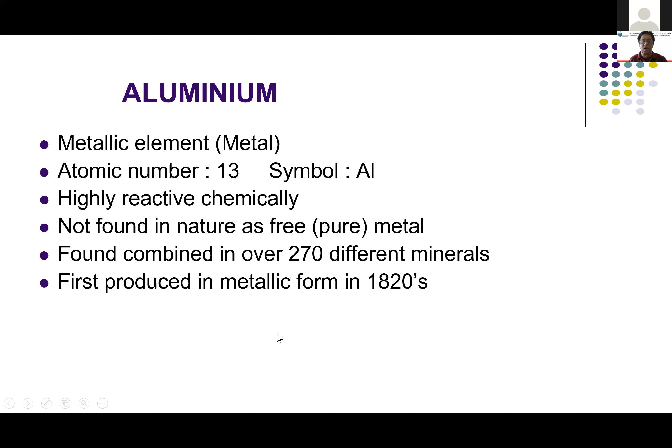This was produced in the year 1820. It was discovered roughly about 200 years ago, and is one of the youngest metals. Source of nearly 99% of metallic aluminum is bauxite. It's a mixture of similar minerals that contain hydrated aluminium oxides.

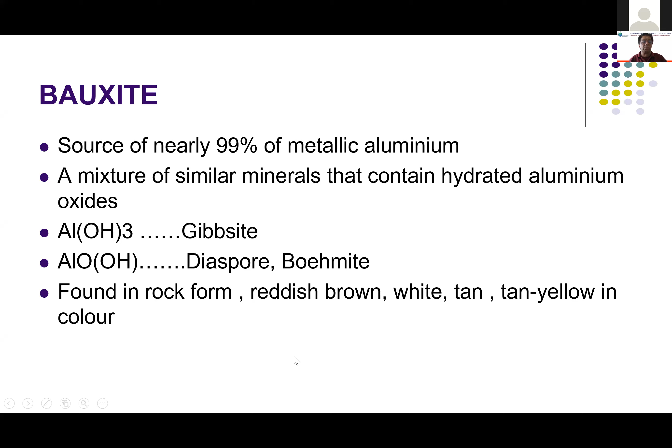How much aluminum is on Earth? This is just for your information. Roughly in the core of the Earth, there is 32% iron - that's right in the core. Some amount of iron is available on the surface. Oxygen, silicon 5%, magnesium about 13%, sulfur 3%, nickel 1.8%, calcium 1.5%, and aluminum is 1.4%. This aluminum in the crust, the outer surface, is about 8%.

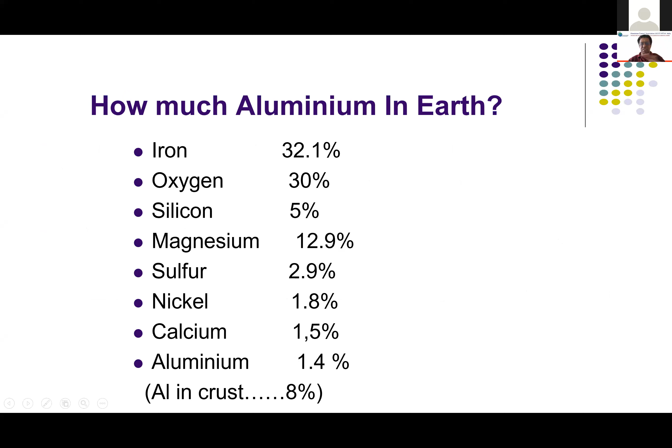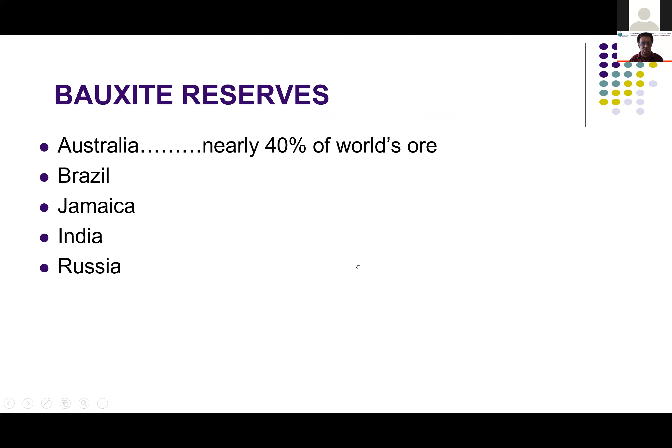These are the major countries producing bauxite from which we extract aluminium: Australia, about 40% of the world's available ore content, then Brazil, Jamaica, India, and Russia. So India is one of the top 5 for bauxite reserves.

You all know that aluminum was originally extracted and reduced to metallic aluminum in 1820 by chemical reduction process, which was very expensive. In the early stages, aluminum was more expensive than silver.

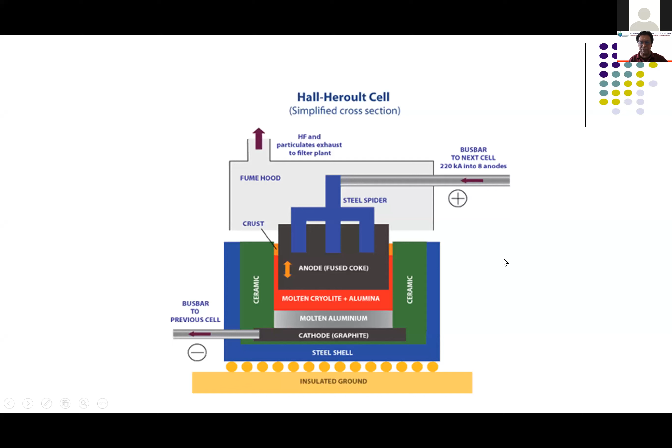Then later came the Hall-Heroult cell process. There were two scientists, Hall and Heroult, who produced this electrolytic process. They discovered this method by which the extraction of aluminum became extremely easy and fast, and the cost of metal also came down drastically.

When you are smelting aluminum, it's a highly energy intensive process - roughly about 15 kilowatt hours, that's about 15 units per kg of metal produced from the bauxite. Abundant hydroelectric power source is needed. Worldwide, roughly about 65,000 metric tons were produced in the year 2021, and the projection is about 70,000 metric tons in the year 24-25.

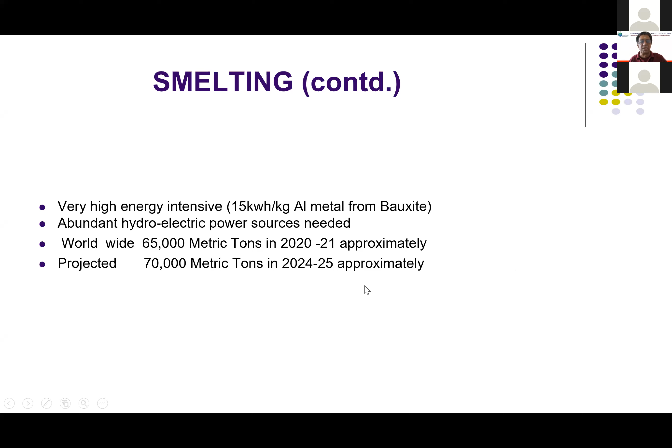Aluminium is a very versatile material. It can be cast, forged, extruded, rolled, drawn, welded, machined, heat treated, vapor deposited, electro deposited, chemically colored, painted, etc. Very versatile metal.

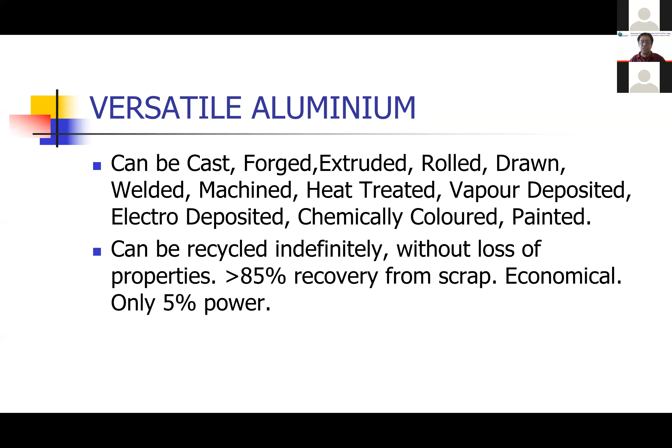It can be recycled indefinitely. This is the most advantageous part of the basic metal, without loss of properties. When you are remelting, refining and recycling it, the original property is not lost. Normally 85% of the scrap can be recovered economically, and recovery or recycling costs only 5% of the original power required to produce fresh aluminum from bauxite.

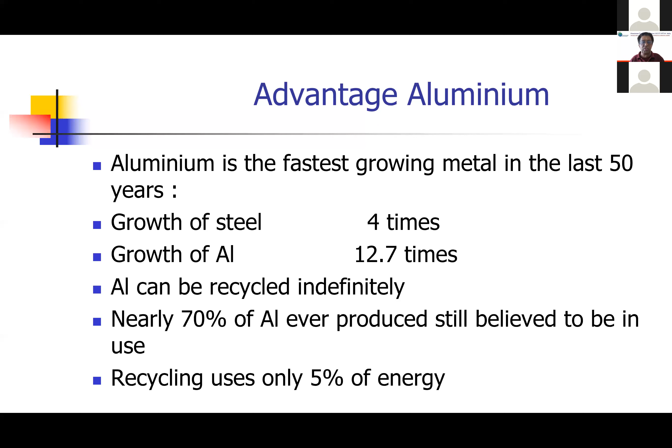Aluminum is the fastest growing metal in the world in the last 50 years. Growth of steel in the last 50 years is roughly about 4 times, whereas aluminum is about 13 times more. Aluminum can be recycled indefinitely. Nearly 70% of the aluminum ever produced, I believe, is still in use over the last 50 or so years and more. Recycling uses only 5% of the energy.

Caution - aluminum, though it is very advantageous with all the plus points, is the most unforgiving metal. If not treated with due respect and care at every stage of manufacturing, it will extract a heavy penalty. Process control parameters are not to be trifled with.

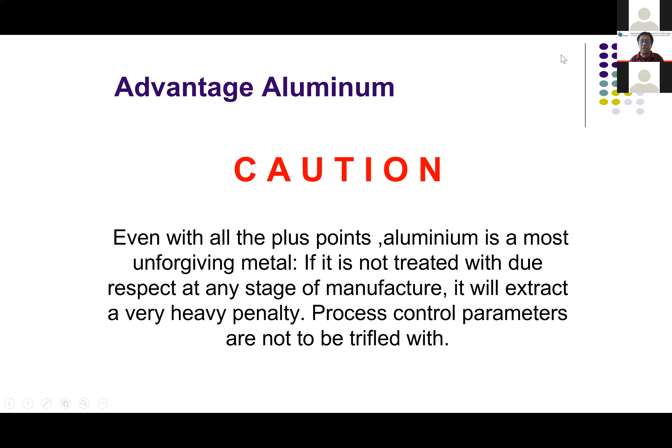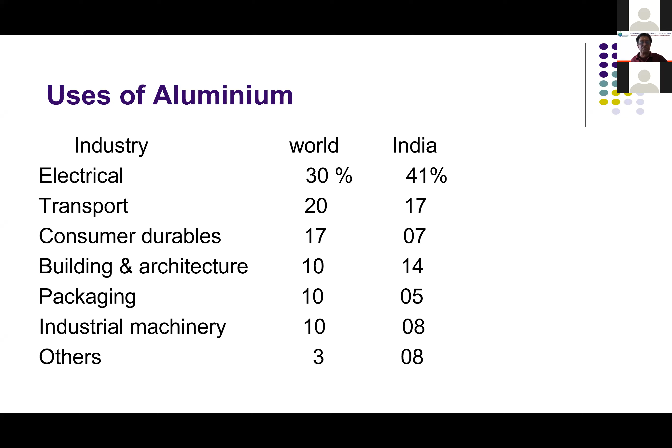Uses of aluminum - you are all familiar. The electrical industry, worldwide as well as in India, consumes most of the aluminum, roughly about 41%. Transport 17%, which includes people like us who are in the casting industry. Consumer durables 7%, building and architecture about 14%, packaging 5%, industrial machinery 8%, and other applications 8%.

Present status of die casting industry in India. This gives you a very rough idea of where all aluminum die castings are used in India.

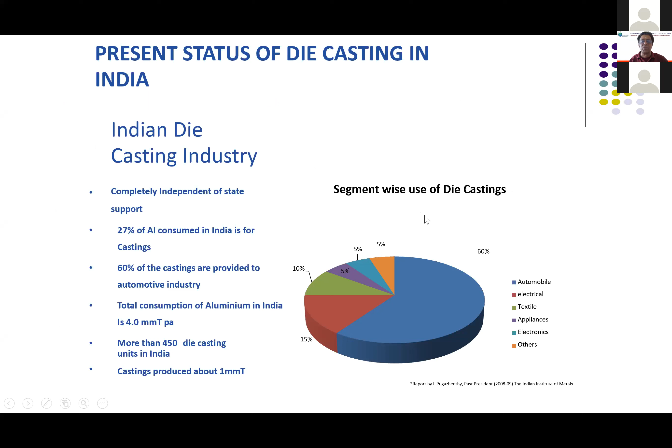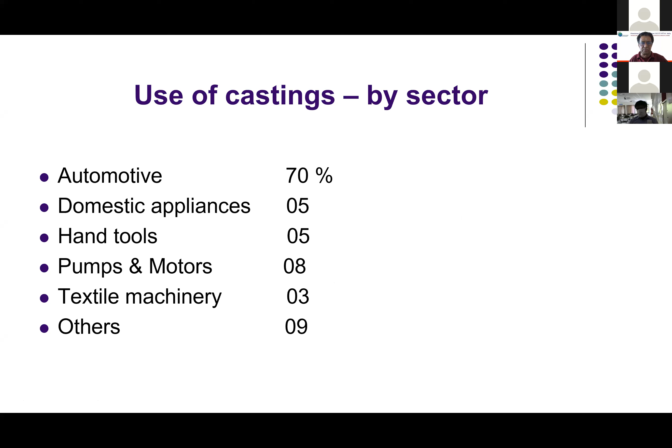Uses by sector - the automotive sector uses about 70% of the castings produced. Domestic appliance 5%, hand tool 5%, pumps and motors 8%, textile machinery 3%, and others about 9%. These are some of the castings used in automobiles, just to give an idea.

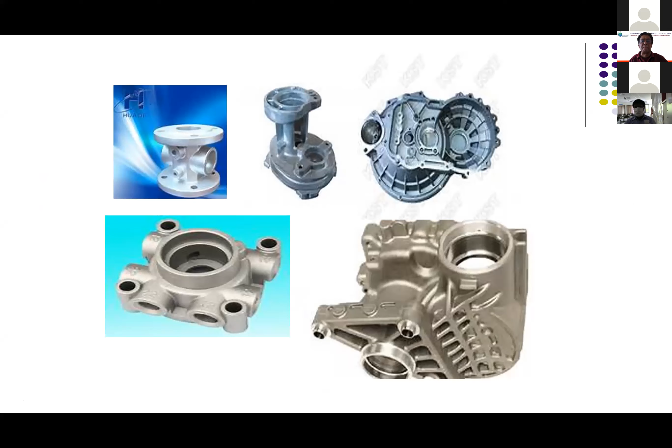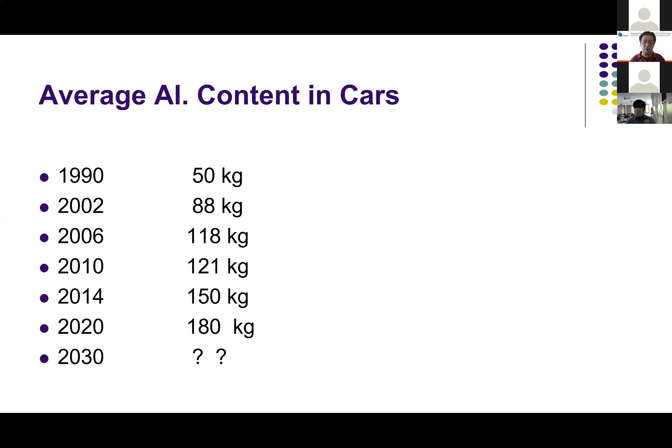These are the historical aluminum content in cars. The major consumer for the die casting industry is automobile, and most of it goes into cars and two-wheelers, motorbikes, etc. Roughly in 1990, 50 kg of aluminum components and castings were used in cars. Today it's about 180 to 230 kg, and it's going to be much more. We've already exceeded roughly 200 kg of aluminum components per car. I believe Tesla is producing even the body with aluminum sheets and castings.

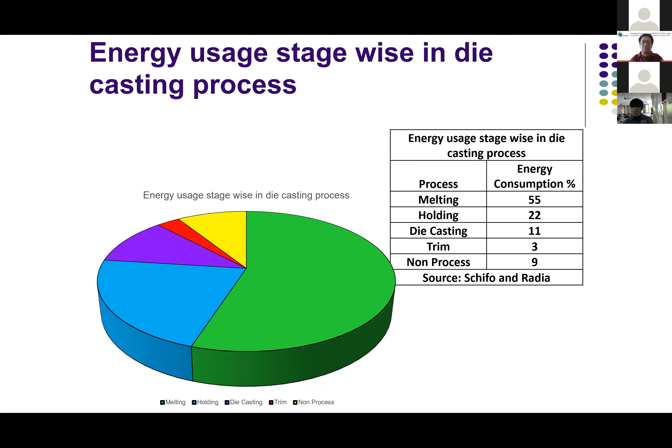Now let's come back to pure aluminum. When you say pure aluminum, it's about 99.5% to 99.8% pure by weight. Density, as you all know, is 2.7 grams per cc. Pure aluminum melting point is about 660 degrees centigrade. The material is very soft and malleable, ideal for wire drawing and making very thin foils. Aluminum foils are extensively used in the packaging industry. Major uses are electric wires, foils, and sheets. This is pure aluminum.

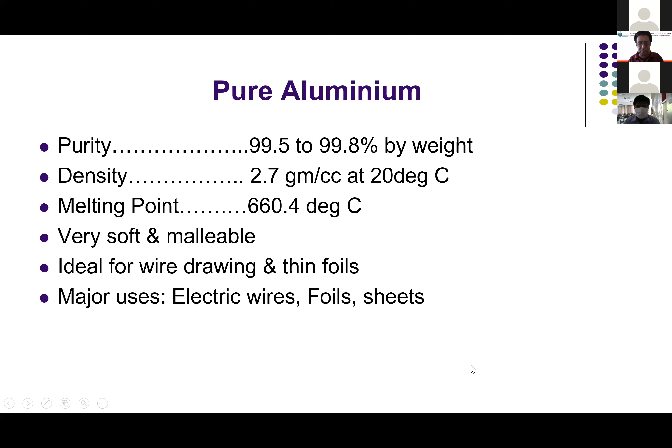There are also some castings made of pure aluminum. I'll come to that slightly later.

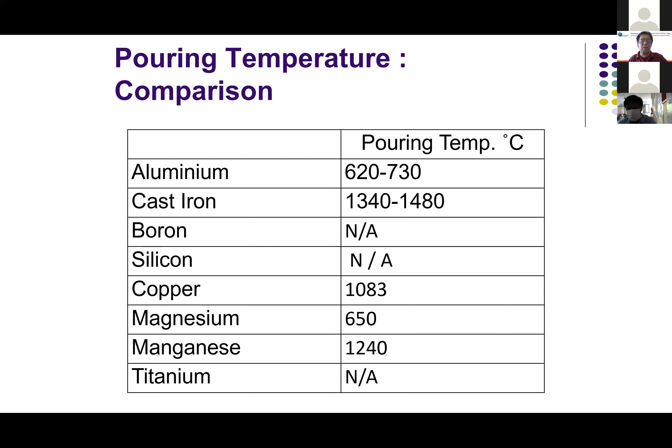Pouring temperature, same comparison. Now comparing density: aluminum is 2.7, roughly one third of iron. That gives a major advantage over steel and iron. Boron is 2.3, and copper is 8.96, so copper is also a much heavier metal. Magnesium is of course lighter, at 1.74.

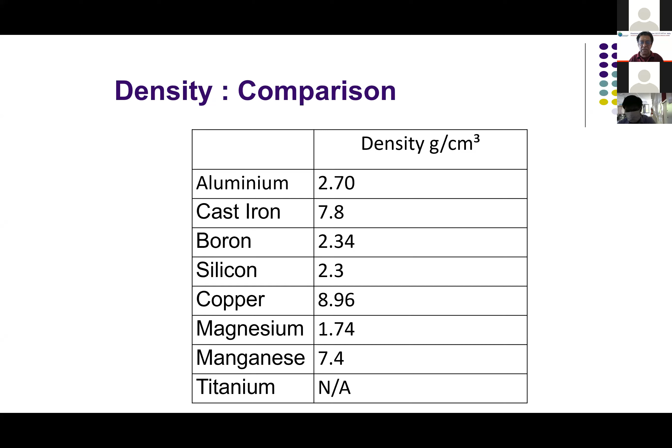Pure aluminum has very low fluidity and is very difficult to cast, especially in gravity die casting, though to some extent it's possible in sand casting. The suitable process is centrifugal casting for rotors, and also pressure die casting in some special processes for rotors made of pure aluminum. I have been to a foundry where they produce rotors by PDC. Aluminum also has a very high affinity for iron. It's highly reactive, as I told you earlier, and has a high affinity for iron, so the tendency to stick to the steel die is very high. This point will come back slightly later.

Now, gentlemen, having spoken a little bit about pure aluminum, I'm coming to the main part: the alloying elements and their effect. This is our main subject for today's program.

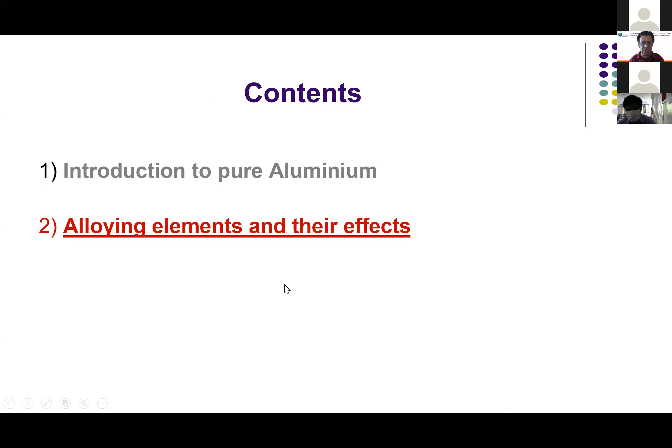What is an alloy? An alloy is nothing but a homogeneous mixture of two or more metals and elements. It should be a homogeneous mixture - in the molten state it should be thoroughly mixed. Properties of an alloy differ from the alloying elements. You take a glass of water and add a little salt - water has different properties, salt has different properties, but the salt solution produced has slightly different properties; something comes from water, something comes from the salt. The same thing happens in aluminum alloy. When you make an alloy of aluminum with silicon or copper, it takes some properties from silicon, and the major properties of aluminum are retained, forming a third metal with slightly differing properties. Properties depend on the proportion of the metal - if you're adding three or four metals to aluminum, it extracts different properties proportional to the percentage added.

Now, there are two things in alloys: one is the major alloying element, the other is minor. When I say major, the proportion is much more than 1%, up to 20-25% - silicon, copper, magnesium are all major alloying components. Minor elements are iron, manganese, nickel, zinc, lead, tin, and titanium. We also add a little bit of strontium, etc. I will come to that slightly later.

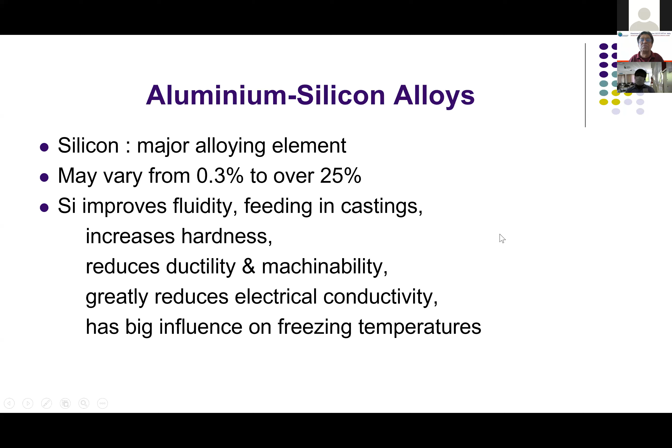It has got a very big influence on freezing temperatures. Pure aluminum freezes at a particular temperature, whereas when silicon is added to aluminum, the freezing temperature makes a change, differs a little bit.

Silicon has the most favorable influence in comparison to all additional elements. We have aluminum, copper, silicon, magnesium as the major alloying components. Silicon has the most favorable influence and is very widely used. Aluminum silicon alloys are very widely used - probably more than 80-85% of all the alloys used in the casting industry are aluminum silicon. Silicon is always present; there are very few alloys where silicon is totally absent, like LM11, aluminum copper.

Coming back to aluminum silicon alloy, solidification shrinkage is only 3% for eutectic composition versus 6% for pure aluminum. Solidification contraction is about 6% for pure aluminum, whereas when you add silicon and make an alloy, the solidification contraction is 3%. That means it is easy to cast, especially in gravity and low pressure casting.

Silicon addition improves the grinding and polishing properties. This is important because nowadays the castings need to be finished after proper machining and all. So silicon, to a great extent, improves the hardness and improves the grinding and polishing property.

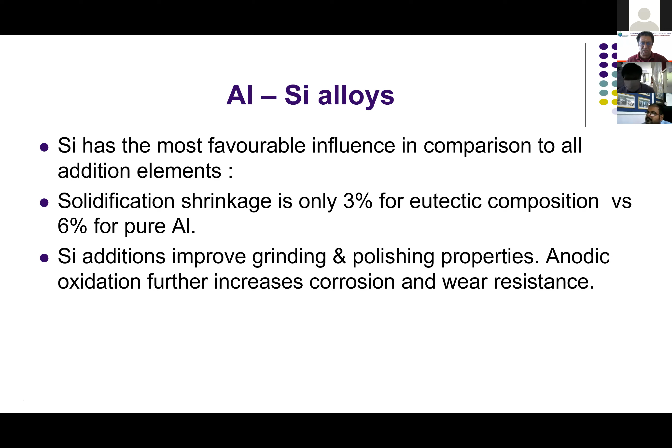Anodic oxidation further increases corrosion and wear resistance. Wherever you expect a corrosive atmosphere and where there is going to be a requirement for wear resistance, silicon is your main alloying element. I'm just giving a phase diagram here.

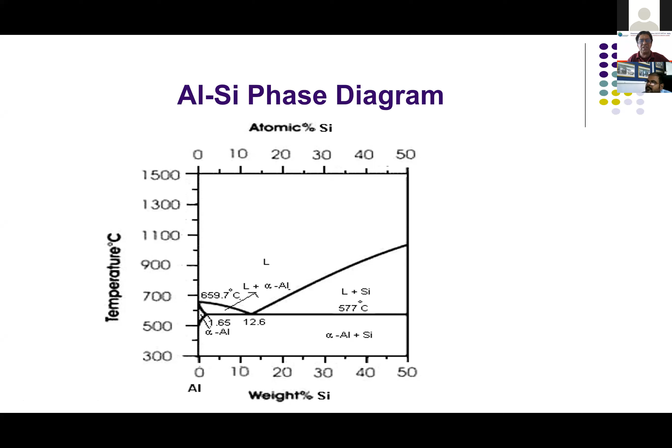Whereas in the conventional Sklenar furnace or rotary furnaces, when you make an alloy, the silicon going into solution is to be ensured. The operator or shop floor engineer standing near the furnace has to see that the silicon goes into solution properly. That is why I normally recommend, when the customer gives a range of 11 to 13, stick to below 12, stick to 11.5, below the eutectic point, which will ensure that you have only alpha aluminium, not pure silicon present in the alloy.

And the alloy maker will always tell you, you are going to remelt it anyway, my ingots are going to be remelted - fine, he is correct. We are remelting it, but we are not going to increase the temperature beyond 750. You require 800 plus to ensure that the silicon goes into solution properly.

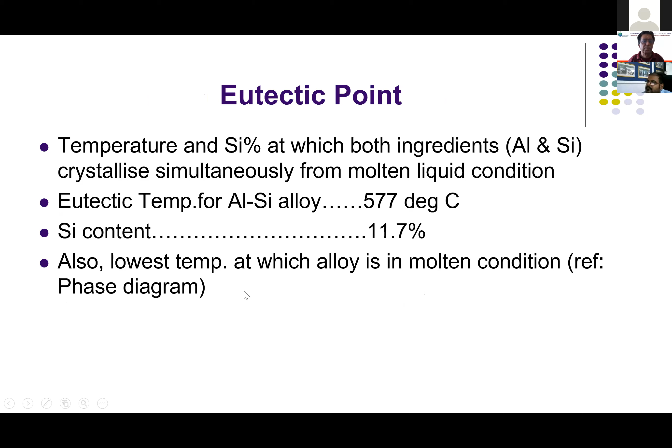Okay, so if we are talking about this, hypereutectic silicon alloys are beyond about 13%. For example, piston alloy - in piston alloy, if you polish it, you can see the crystals of silicon particles. It gives extremely high hardness, and it is very difficult to machine a piston. You require highly sophisticated diamond tip tools, etc., to get a proper machined surface. This is why they are adding more than 13% - we require a very good surface hardness on the pistons, especially in automobile engines.

The piston is the one which gets a lot of wear and tear, and therefore it requires extremely good high surface hardness. That is why we add more than 13% silicon. Hypereutectic alloy is very difficult to machine due to high silicon content, but shows very good wear resistance, hence used in pistons.

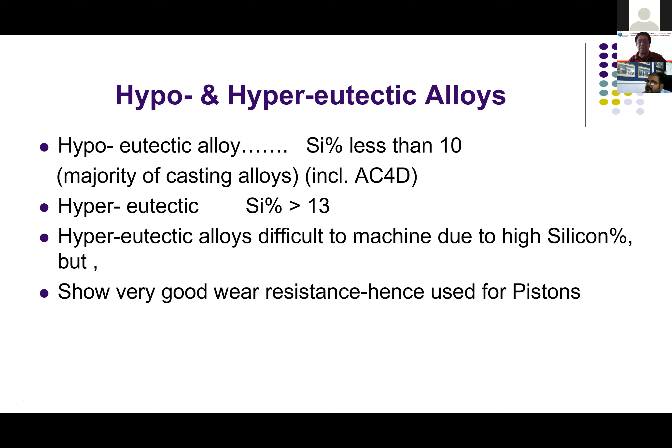So that's why whenever I suggest that the casting people should visit the alloy maker, or if you are making your alloy in-house, you ensure that the silicon goes into solution properly. If the silicon does not go into solution, it is going to create more problems in the form of shrinkage at the casting level. While cutting and grinding, you'll have rough surface, and your tools also wear and tear very fast.

Now coming to the alloying element copper, the second major alloying element. Copper is a metal, whereas silicon is a non-metal, that's why we called it an element earlier. Copper's melting point is much higher, but still at 750 degrees centigrade, copper is added to liquid aluminum. It dissolves like ice going into lemon juice, like salt dissolving in water.

When you maintain aluminum around 750 degrees centigrade, you add copper in the form of small ingots, piglets, copper wire, or copper scrap. It goes into solution beautifully and dissolves very well, so dissolving copper is not a major issue. Even though copper's melting point is very high, and silicon's melting point is also over 1400 degrees centigrade, it dissolves in aluminum maintained at 825-850 degrees.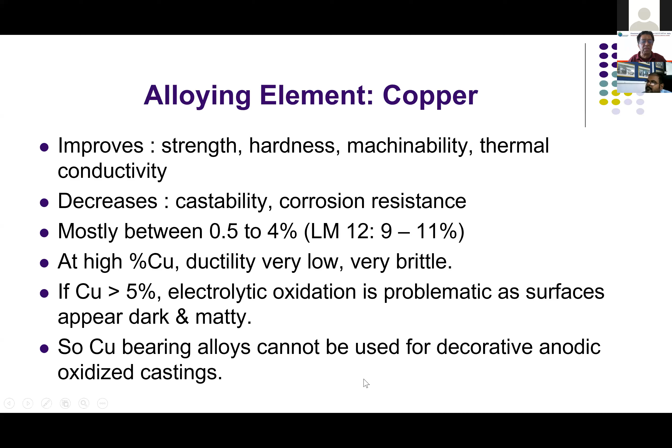Copper bearing alloys also cannot be used for decorative anodic oxidizing casting. The anodic process cannot be employed in copper bearing alloys. This is very difficult.

I came across an alloy, LM12, which has very high tensile strength and elongation beyond 10%, but castability is poor. You can do low pressure die casting or other types of casting, gravity die casting is also possible, but sand casting is widely used for this particular alloy. It is heat treatable, which I'll come back to slightly later, though I won't go too deep into it.

As I told you, there are a few elements which go into solid solution - one solid dissolves in another solid. You're all familiar with a liquid dissolving a solid, for example water dissolves sodium chloride crystals. Molten aluminum dissolves copper, molten aluminum dissolves silicon, molten aluminum dissolves iron, bolts and nuts - everything gets dissolved.

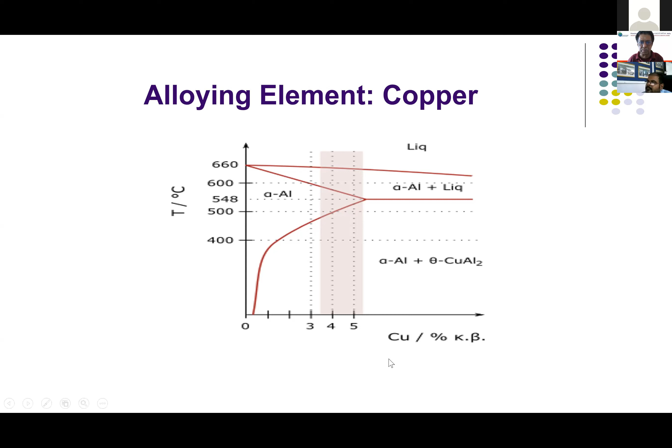Now coming to magnesium - normally it is added between 0.25 to 0.5%, and it improves the hardenability by heat treatment. The same thing happens here. I'll show you the aluminum-silicon-magnesium phase diagram, and come back to it slightly later.

Magnesium has the same property as copper. When heated above 400 degrees centigrade, the magnesium in the grain structure dissolves inside the aluminum structure, and then reprecipitates during controlled cooling and other heat treatment processes. This improves the hardenability. The most widely used alloy is LM25, where silicon is about 6 to 7.5%, and magnesium is about 0.3 to 0.5%, which improves the hardenability.

Here I would like to say something - many people are using LM25 in gravity die casting. This entire lecture was prepared for a classroom session, and here I'm not able to see you, so I'm finding it a bit difficult to explain, as I don't have a drawing board to draw and show you.

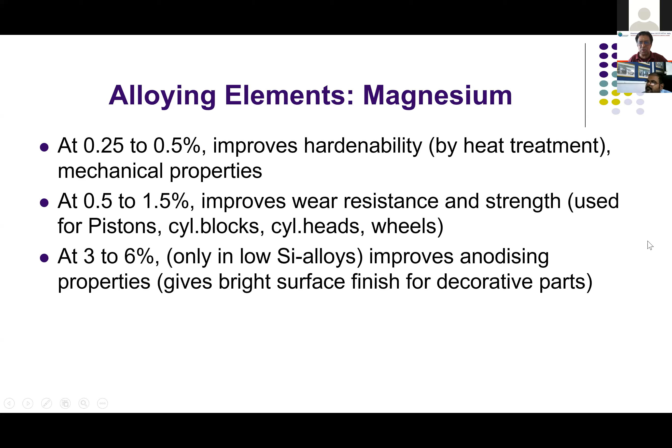0.5 to 1.5 improves the wear resistance and strength. Again, 1.5% is used in pistons, cylinder blocks, cylinder heads, and wheels. 3 to 6%, only in low silicon alloys, improves anodizing properties, giving a very bright surface finish for decorative parts. These are all more towards the non-automotive components.

Back to alloying: due to low potential difference between Mg and Al, corrosion resistance to alkali and seawater is very high. Therefore, use of magnesium in chemical industry, shipbuilding, and food industry is recommended.

Magnesium bearing alloys, grades of magnesium as primary alloying element, are ideal for decorative applications. There are some alloys where the magnesium is about 5-6%. These are mainly used for decorative parts where you get very good colors and very good surface finish.

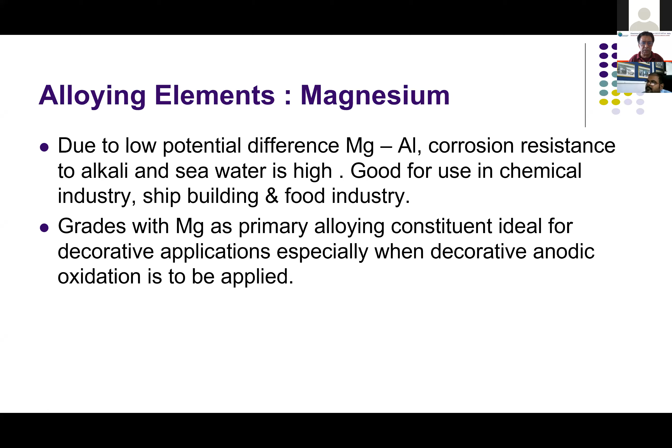As I explained earlier, this also goes into solid solution. Suppose you have 0.3, or let's say 3%, you are somewhere here. When you heat it around 520, 530, the magnesium disappears completely. Then when the temperature slowly comes down, magnesium reappears in the finer form, improving the hardness and tensile strength. So therefore, magnesium below 0.1 is of no use. Magnesium has to be above 0.25, around 0.3 to 0.4. Highly recommended is 0.35 to 0.45.

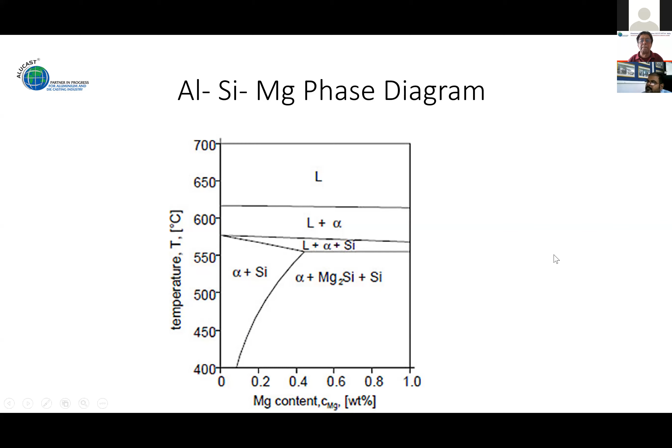Coming back to alloying, iron. Iron is not an alloying element per se, I repeat, iron is not an alloying element per se. Aluminium has got a high affinity to iron. Molten aluminium literally eats iron—whether it is a spoon, ladle, skimmer, or dross remover—it will just dissolve in molten aluminium. So we have to take proper care while using steel spoons or steel skimmers.

It should be properly coated with oxide so that the metallic surface does not come into contact with the molten metal. Even at the smelter where pure aluminum is produced, the major impurity is iron. So aluminum has got a high affinity for iron. Beyond 0.5% iron reduces the castability.

So we normally recommend iron below 0.4. For low pressure and gravity die casting, ensure that iron is below 0.4, especially where the metal is held for more than 6 to 8 hours inside the crucible—there the problem of iron pickup will be more. If you measure iron at the beginning and end of the shift, you will see a marginal increase. Once iron gets into the molten metal, it is difficult to remove. Reduction is impossible, removal is impossible. Reduction is possible only by dilution.

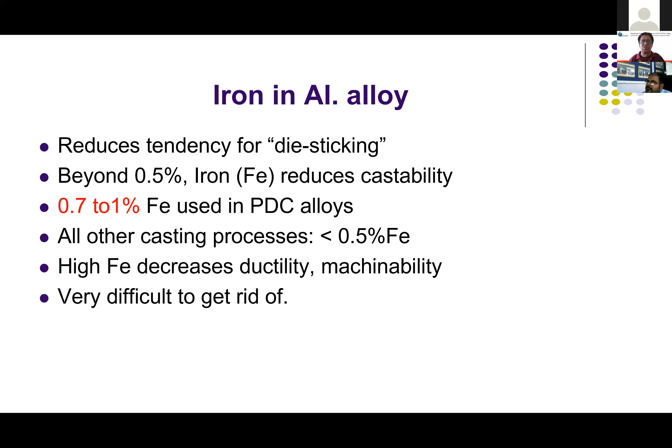If you have any problem of ejection, try to improve the die spray. Control the die temperature in pressure die casting. Improve the spray. Reduce the water. Use a slightly highly concentrated dilute and release the casting. Don't expect iron to be added and produce the casting. Your castings will be very difficult for machining, and also the life of the casting will go down.

Manganese in aluminum alloy improves the strength and casting soundness. It is normally used above 0.5%, definitely not above 0.7. We normally recommend half of iron.

Suppose the iron is 0.7 or 0.8, I recommend 0.4% manganese, because this controls the effect of iron on the silicon present. Iron always plays its part, spoil sport, in the silicon structure. So there, manganese controls the iron, it ties down the iron.

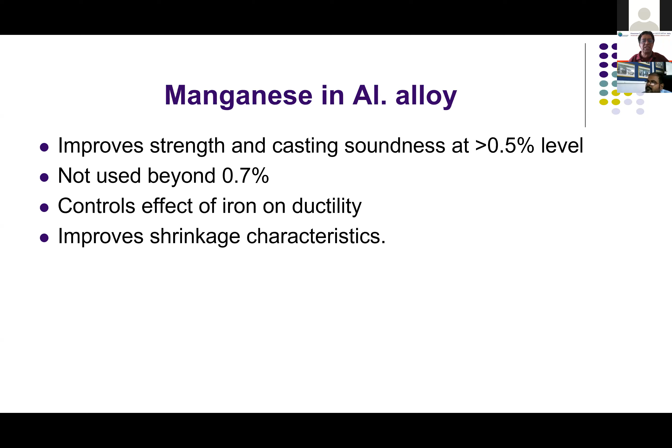For example, if you have 0.8 or 0.9% iron and you wanted to control it, add 0.4% manganese. It ties down the free iron which goes after the silicon particles or silicon in the main alloy. So manganese is used, not exactly as a major alloying element, but as a minor alloying element to control the bad effects of iron.

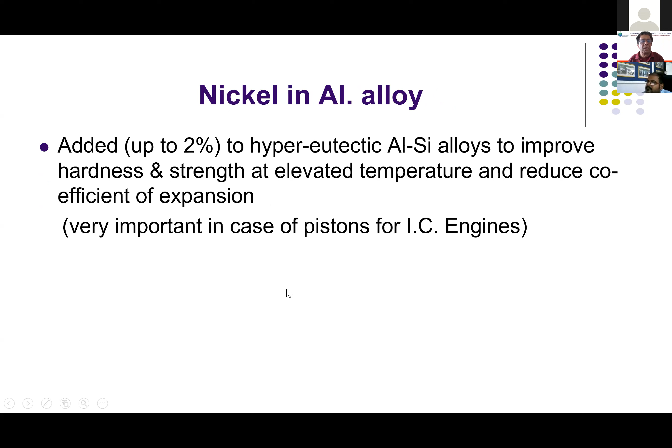Nickel is added up to 2% in hypereutectic alloy, aluminum silicon alloy, to improve hardness and strength at elevated temperature. High temperature strength is achieved by adding 2% nickel. Very important in case of pistons for IC engines.

Zinc again is not a major alloy element, but it is added sometimes. Most of the American specifications, if you see, will have some amount of zinc, whereas European and Indian specs normally don't add zinc deliberately. When present along with copper and magnesium, it adds greatly to improve the properties. For example, if the magnesium is in the border range of 0.3, 0.35, presence of zinc helps you to improve the hardness. So zinc to some extent improves the heat treatment properties.

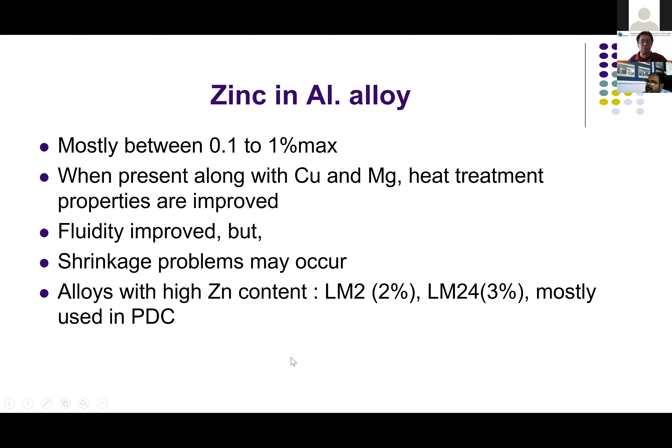Fluidity improves, but zinc also has got a negative problem. Shrinkage problem may occur, microporosity, macro shrinkage may occur. LM24 is mostly used in PDC.

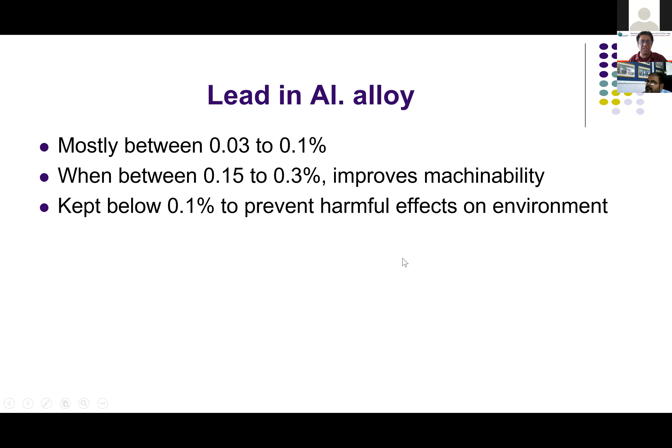Lead, again, I would rather classify this as an impurity or minor element, mostly between 0.03 to 0.1%. When between 0.15 to 0.3, it is deliberately added to improve machinability. But we keep it below 0.1% to reduce the harmful effects on the environment at a later stage when the material is scrapped.

Titanium, per se, is not an alloying element, but it improves the grain structure along with boron at a ratio of 5:1, five parts titanium to one part boron. Smaller the grain, higher the strength, so it improves the grain structure vastly. We recommend titanium in most alloys between 0.1 to 0.15%, and in some cases up to 0.2%. Where you require very high strength and high elongation, we go for 0.2% titanium, and normally we don't exceed that.

This is mainly used as a grain refiner. Gentlemen, you are all familiar with grain refining - we can touch on this subject at a later date, grain refining and modification. Coming back to strontium.

Earlier we used to use sodium as a modification agent, 15, 20, 25 years back. It has its own bad environmental effects, so slowly the usage of sodium has gone down. Strontium has replaced it. Strontium essentially modifies the way silicon dissolves and appears in the microstructure - silicon in the form of needles versus silicon in the form of a globular structure with rounded edges gives higher strength and higher surface quality. Strontium does a very good job in this area. 0.008 to 0.04% of strontium modifies the silicon structure. So in GDC and LPDC, where you require good modification, instead of sodium we go for strontium. Sodium is no longer used.

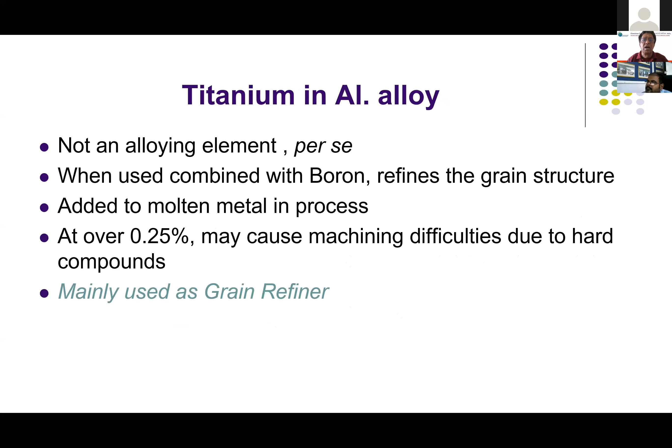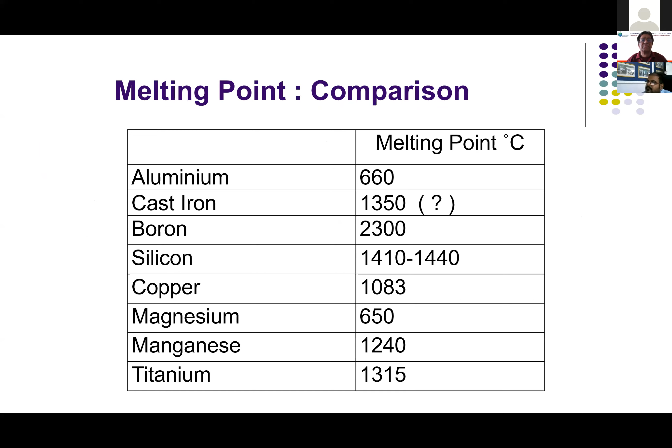Gentlemen, before I close this, I would also like to mention some of the impurities present in aluminum alloys. We talked about this briefly but I didn't mention it again. Coming back here, if you see the minor elements, we mentioned iron, manganese, nickel, zinc - we discussed zinc, and we discussed lead also.

Tin is a funny material. This comes into the alloy - it's not supposed to be present, right? It comes in from the alloy maker, who collects all sorts of scrap from the market, puts it in the furnace and melts it to get this metal. Sometimes tin comes into the aluminum scrap and gets dissolved. Now tin has a very bad effect - combined with high iron content, let's say 0.8% to 1% iron, the casting becomes very brittle.

In pressure die casting, this was one of my personal experiences. For some reason, the tin content went up, and the casting became very brittle. While ejecting, castings were cracking, and it was very difficult to remove from the die. They kept adjusting the die, polishing the dies and everything, but castings were still cracking. While handling and fettling, we were losing more castings. Later we found out it was tin, the culprit, combined with high iron - 1.1% iron with a little bit of tin present.

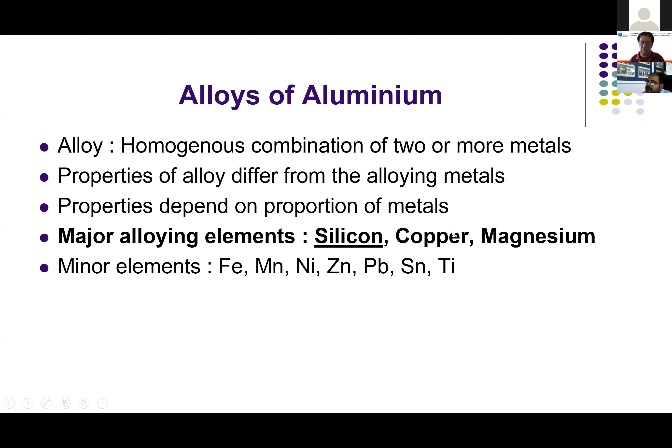So therefore, whenever you buy the alloy from an alloy maker and do your spectro check, we normally focus on major elements. Please focus on minor elements also, and try to keep them as low as possible, both commercially and technically.